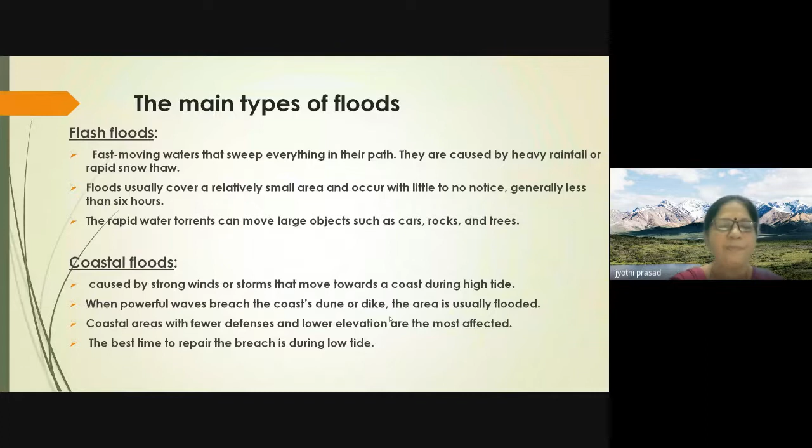And the other one is the river flood. So river flood means it is characterized by gradual river bank overflows. The river which is flowing, you can see it is gradually increasing. It is not suddenly increasing, it is gradually increasing because of the extensive rainfall, and it will extend from the banks sometimes.

So here mainly the area which is covered by the river flood all depends upon the size of the river and amount of the rainfall. Okay, so especially for river floods, it mainly depends on the size of the river as well as how much rainfall has occurred.

And in this case, in river floods, loss of lives rarely takes place. Loss of lives will be less, but it can cause immense economic damage. So it is going to create economic loss, especially the irrigated areas and all. Those things are going to be damaged by the river floods.

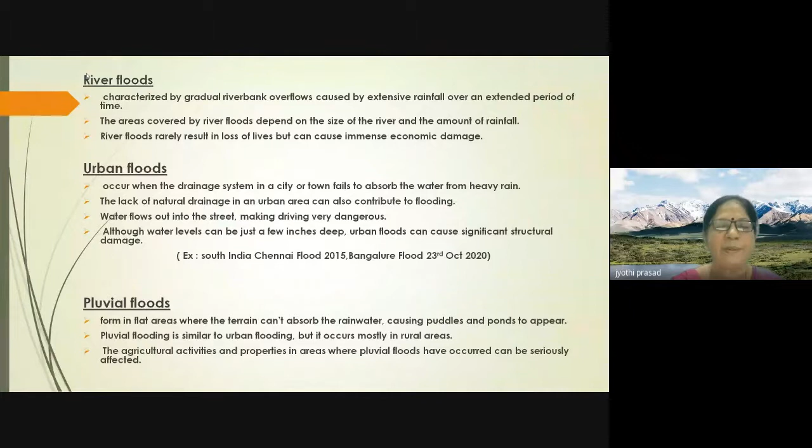And even the lack of natural drainage in the urban area is also contributing to the flood. And water flows into the street, making even driving very dangerous. I used to hear, especially in Muscat, that if the rain comes, most of the accidents take place because it is so steep and slippery, and the speed of the cars is also high, and they come and hit the cars. So that is also very dangerous.

Even though it is only a few inches deep in the case of urban floods, it creates a lot of problems for the public, especially in India. Nowadays we have heard, especially in South India, of the Chennai flood. The Chennai flood, which occurred in the year 2015, was caused by the rainfall and the concrete jungle; there was no proper drainage. Because of that, the entire Chennai was under flood.

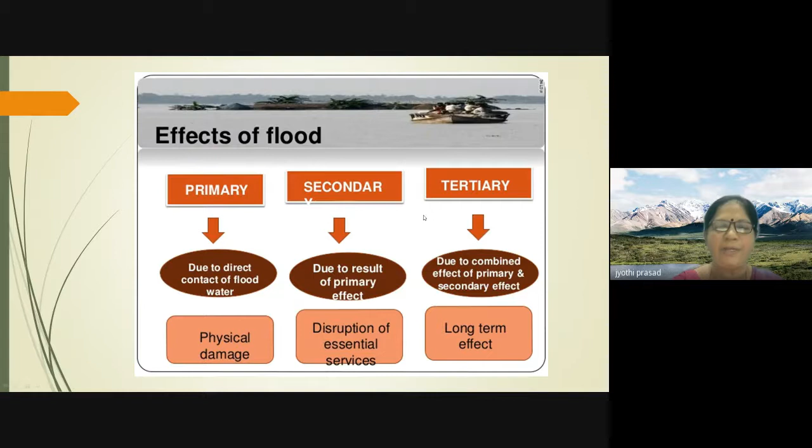So now, what is the secondary effect? The secondary effect disturbs certain services. Mainly, the drinking water supply may be polluted, especially if sewage treatment plants are flooded. If a sewage treatment plant gets flooded, it will definitely affect the drinking water supply. It may result in diseases and other health issues, especially in underdeveloped countries.

Even gas and electrical services may be disturbed. The transportation system may also be affected, resulting in shortage of food supply, vegetable supplies and so on. And sometimes, in underdeveloped countries, there can be a food shortage, and it may lead to starvation.

And what will be the long-term effect? The long-term effect is the tertiary effect. What happens here? The location of river channels may change as a result of flooding. Whenever a flood comes, the river channel may change its path, so a new channel develops, leaving the old channels dry. That is one of the effects. And even sediment is deposited by the flooding.

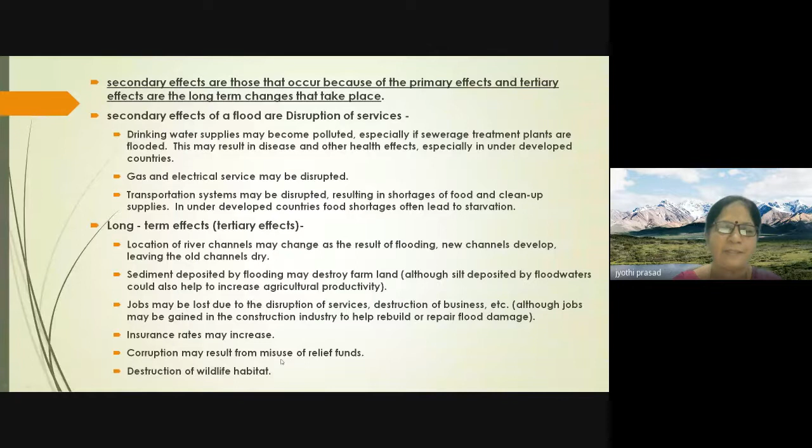So now, flood management. It cannot be absolutely controlled, only managed. Even though we say we can control the flood, and many researchers are working on it, it cannot be absolutely controlled. 100% control we cannot do; we can only manage it.

So what is the aim of flood management? The main aim is, whenever there is a flood, the first priority is protection of the people and their property. And also, as far as possible, reduction of flood risk. Whatever damage is going to happen, as far as possible, management tries to reduce the flood risk.

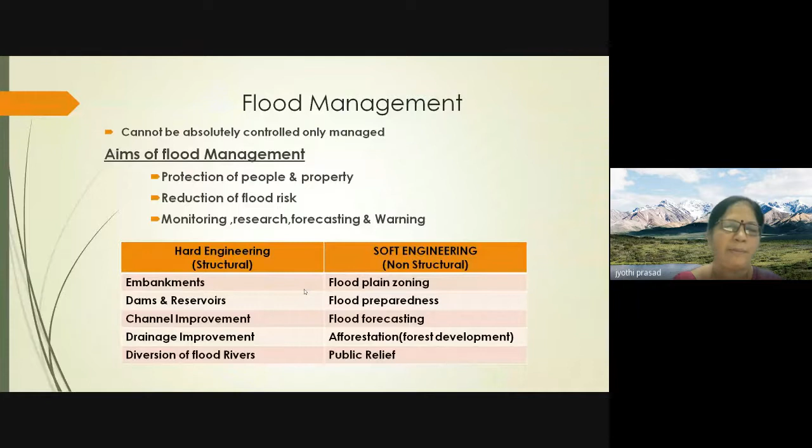For the public relief, what we are going to do, there are diversions of flood rivers. This diversion can be for irrigation purpose, or for the flood river water whenever it comes, and it will be left to one particular place, and the flood is diverted so that once flood water recedes, that land can be used by the public for irrigation purposes. So like that, we are going to do the flood management. Anyhow, it cannot be absolutely controlled, it can only be managed.

So now we know, especially in India, 9% of the total population, that is around 113 million people of India, are exposed to floods. And as per the World Resources Institute 2015, they have estimated around US $14.3 billion of the Indian economy is exposed to flood risk. So India is highly exposed to flood; 9% of the total population is exposed to flood.

So if you see here, the flood toll from 2016 to 2019-20: in 2016-17 the number of deaths across India was 1550. And similarly in 17-18 it was 2494. Like that, we have the number of death cases. And houses damaged in India in terms of lakhs: in 2016-17 around 5.5 lakhs, and in 17-18 around 11.9. So like that, lakhs of houses people have lost because of the flood.

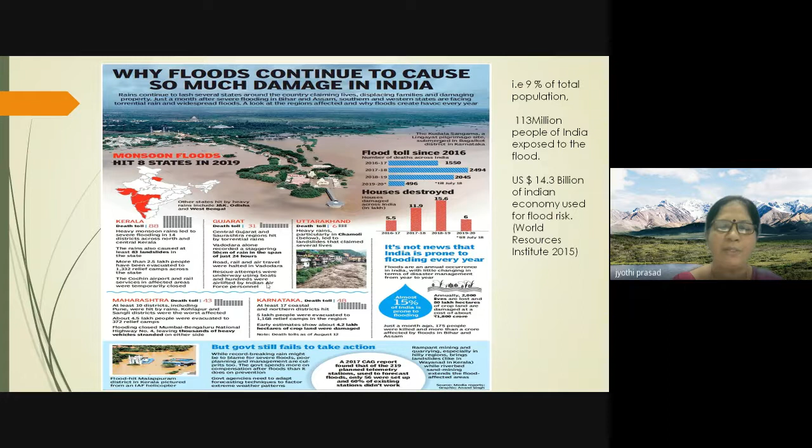So how are we going to study flood water management? All of us know, for flood control we need to construct a dam. Dams are the most important infrastructure for any developing country like India. India's total large dams are around 5,701, and in operation around 5,254, as of 2016, maybe still more now. Maharashtra has the maximum number of large dams, 2,354. Next to that we have Madhya Pradesh.

These dams especially help in flood water control, and they help for irrigation. As we know, around independence, the first priority of dam construction was irrigation, because food was the priority. So dams serve flood control, irrigation, municipal and industrial water supply, hydroelectric power generation, and recreation purposes too. So we have constructed dams with several aspects in mind.

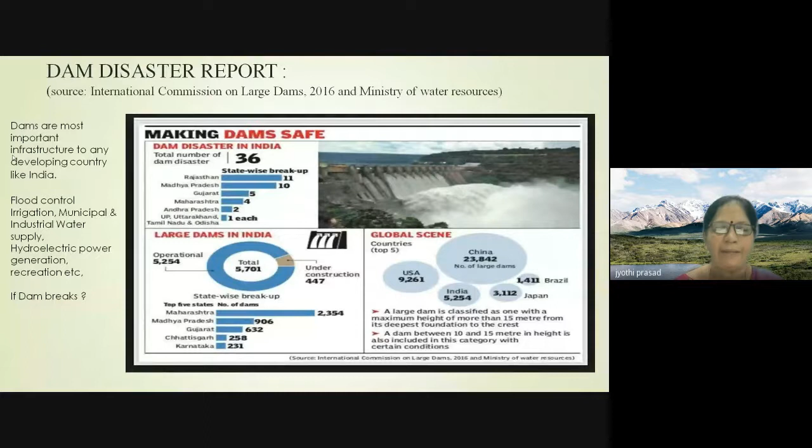But as I told, everything is nature, and nature will take its own way to balance the earth. So now suppose the dam breaks. What are the most frequent causes of major dam failures? According to the Costa report of 1985, the major causes of dam breach were overtopping due to insufficient spillway capacity, 34%, piping and seepage, 28%, and foundation defects, 30%.

And according to the UNDP report of 2004, among all natural water disasters, flood causes 50% of the total loss, and annually an average of about 196 million people across 90 countries are exposed to catastrophic flooding.

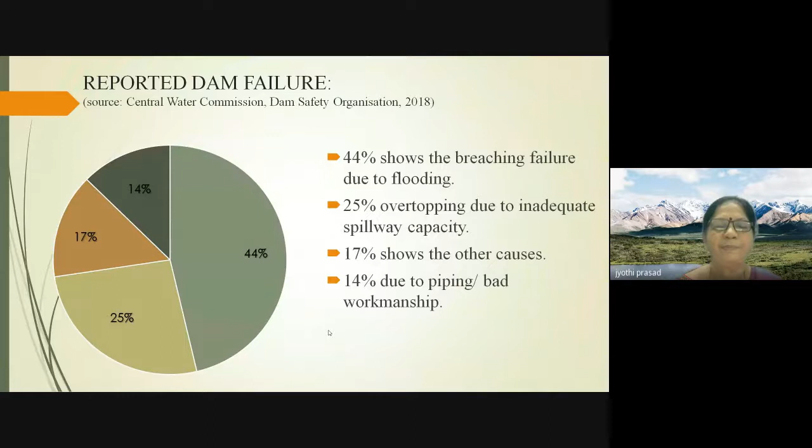So now, according to the Dam Safety Office, Water Resources Research Laboratory, Reclamation, in 1998, the methods of analysis are grouped into 4 categories. One is called the physically based method. The physically based method uses erosion models based on principles of hydraulics, sediment transport and soil mechanics. Development of the breach and the resulting breach outflow are anticipated, to see what the breach outflow will be.

The second one is the parametric model. The parametric model is based on breach geometry and failure time, which are estimated using case studies. With the help of hydraulics, breach outflows are assessed, and the breach expansion is evaluated as a time-dependent linear process. That means the breach geometry and failure are taken as a time-dependent linear process in the parametric model.

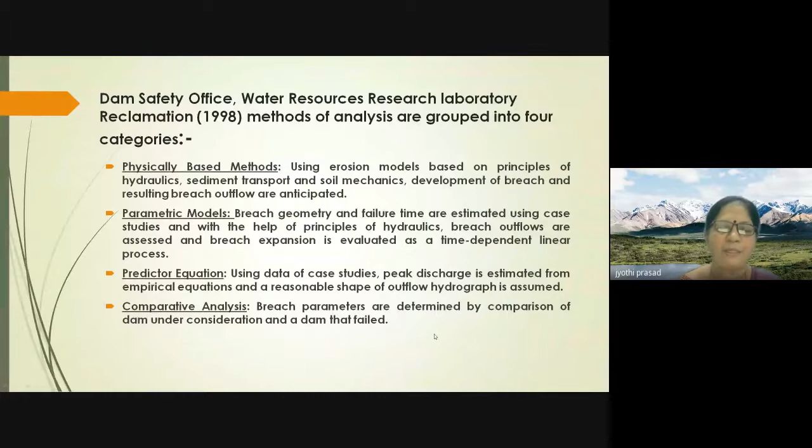The third is the predictor equation. Using data from case studies, peak discharge is estimated from empirical equations and a reasonable shape of the outflow hydrograph is assumed. And the last one is comparative analysis, where breach parameters are determined by comparing the dam under consideration with dams that have failed.

So now, dam breach modeling. Regardless of the design or construction of the dam, increased forces are applied to it during extreme events, which increases the potential risk of failure. Even a well-designed dam can face extreme events with a potential risk of failure. Therefore, dam breach analysis is conducted to determine the ultimate discharge from a hypothetical breach of the dam under such events.

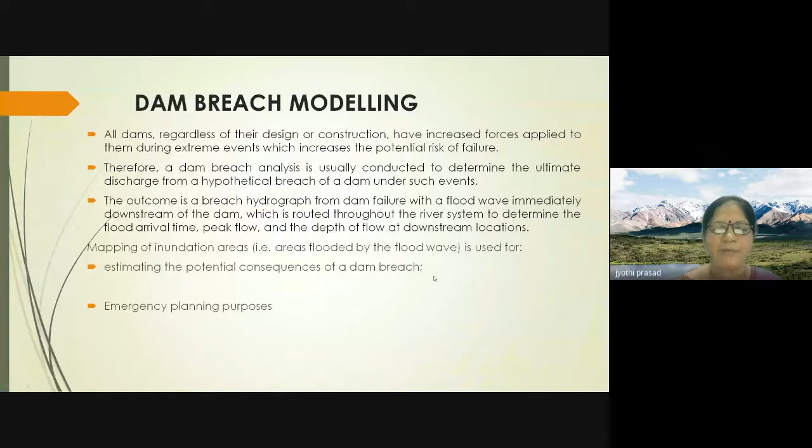The outcome is the breach hydrograph from the dam failure, with the flood wave immediately downstream of the dam, because when the flood breaches the dam, it moves towards the downstream side. It is routed through the river system to determine the flood arrival time, the peak flow and the depth of flow at downstream locations. Along with that, we need mapping of inundation areas, meaning areas flooded by the flood wave. This is done mainly for estimating the potential consequences of the dam breach and for emergency planning purposes.

So in dam break analysis, there are two primary tasks for analyzing potential dam failure. First is prediction of the reservoir outflow hydrograph, and second is routing of that hydrograph through the downstream area. To predict the reservoir hydrograph, there are some fundamental steps that need to be done.

One is prediction of breach characteristics, which may include the shape and size of the breach and the rate of breach formation. Breach characteristics mainly involve what shape the breach generally takes, what its size is, and the rate of breach formation.

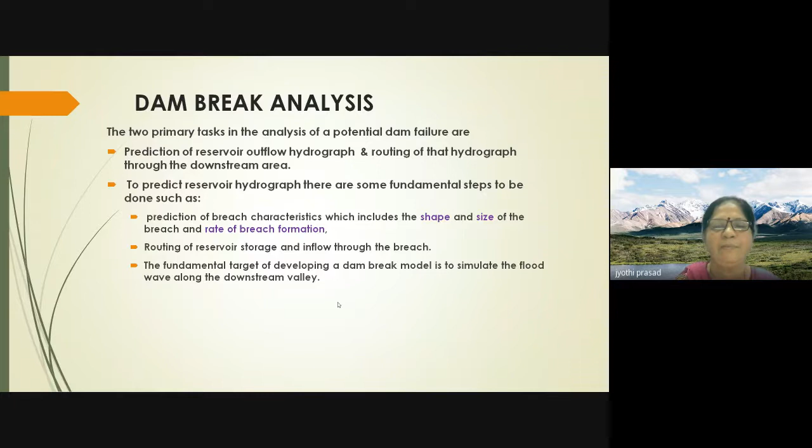So now, why do we want to study the dam break model? So the purpose for which we need to study the dam break model is, one, especially we can say it is the most important one, is preparedness - preparedness to tackle the disaster. Whatever the flood which is from rainfall has come, because of that this much flood is expected, and then finally what disaster can be expected.

So for that we need to have a preparedness to tackle the disaster. And then we need preparation of an inundation map. Preparation of the inundation map means at the downstream side, when the flood has come, how much distance it is going to cover, and then at what time the flood is to come, and we have to see how much area it is going to cover. So that time is also taken. That's why preparation of inundation map is required.

And then once the flood has come, before that we have to do the evacuation plan for the public. We have to intimate the public, like flood is coming, we have to evacuate. So recently on TV also you are seeing the news for evacuation where the gas is moving, so there also they are doing the evacuation of the public. So similarly here also for flood, we need to do the evacuation plan for the public.

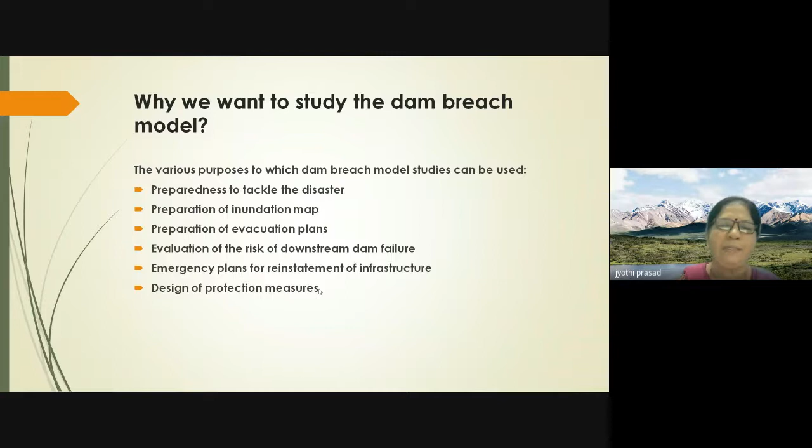And now, emergency action plan. So in case of emergency action plan, we have to identify those situations which would require initiation of an emergency action and specify the action taken and by whom. All these things should be considered.

Like an emergency may include a dam incident. What is this dam incident? It is an abnormal condition, or performance of the dam, with the potential to endanger the safety of the dam, but which is not expected to lead to a breach of the dam. So it is just highlighting that there can be a dam breach - it is just not expected, but you can say it endangers the safety.

And second is a dam alert. So dam alert means what we are going to see is that here there can be an intervention which could further degenerate with time and lead to the breach of the dam. So how the flow is occurring and what is the time, so that the breach can occur in the dam. That is a dam alert.

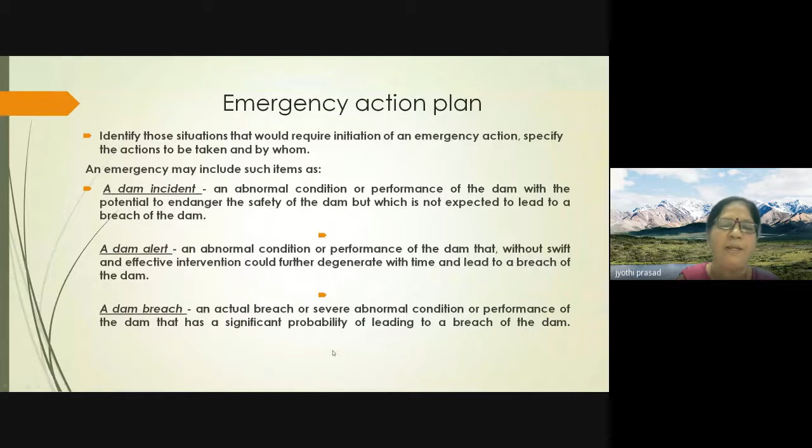And then dam breach. So dam breach means the actual breach, or we can say it is a severe abnormal condition, or performance of the dam that has significant probability of leading to the breach of the dam. So it is the worst condition in which the dam is going to breach. So that we have to see.

For that, we have to identify the people who are involved, like different agencies and alternative methods and the emergency action plan - we have to identify them. And even we have to identify the primary and auxiliary communication systems, both internal, that is between the persons at the dam, and external, between the dam personnel and outside agencies. And we have to identify all the agencies who are directly or indirectly involved, especially to prepare the emergency action plan. And finally, it leads to the development of the draft of the emergency action plan. So that is one of the most important parameters that needs to be taken into consideration.

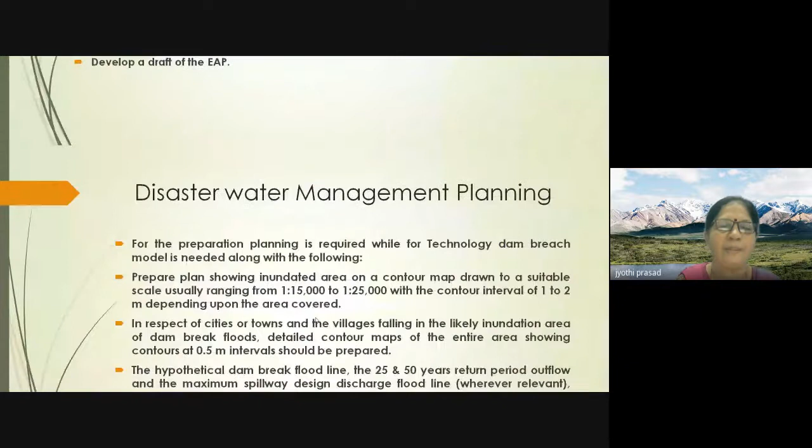So when we do the disaster water management planning, for the prediction and preparation of planning, it is required. Anything we want to do, we have to require a planning. Preparation of planning is one of the most important things. For technology, we need a dam breach model, along with what things we have to take into consideration. So we need preparation of planning, and we need the technology for dam breach model.

So for that, we need to prepare a plan which should show the inundated area on a contour map. It can be drawn with a suitable scale, which may vary from 1 in 15,000 to 25,000, with a contour interval of 1 to 2 meters, depending upon the area to be covered.

In respect of cities, towns and villages falling under the inundated area of the dam break floods, detailed contour maps of the entire area, showing a contour interval of 0.5 meter, should be prepared. So a detailed study of what cities, towns and villages fall in the inundation area. When the dam breaks, a contour map has to be prepared for the entire area.

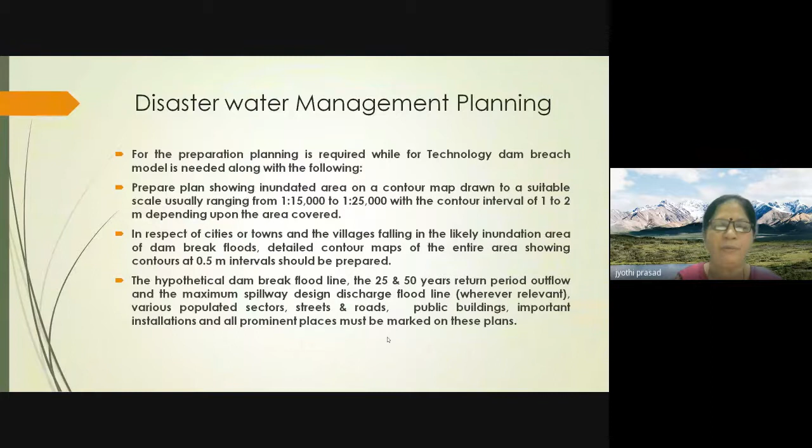Hypothetically, if you see the dam break flood line, that is the 25 and 50 years return period outflow, and the maximum spillway design discharge flood line wherever relevant, various populated sectors, streets, roads, public buildings, important installations, and all prominent places must be marked in the plans. We have to see the 25 to 50 years return period flood going out from the spillway. All this data should be there.

Now, speaking on the inundation map, we need to prepare an inundation map. Whenever dam failure occurs, at the downstream side, how much area is included - that should be in the emergency action plan. Correspondingly, we have to see what will be the level of effort used in calculation. Inundation maps should also show the time to flood and time to peak flow.

The complexity of inundation mapping depends on the expected impact of the dam failure on the downstream population and infrastructure. Those things should come in the inundation map, especially the approximate inundation maps.

Where do we get it? It is generally prepared by Survey of India, which is responsible for all topographical control, surveys and mapping of India. Survey of India topographical maps give all the details, city street maps or other maps. Some are available as free internet map services like Google Maps, Bing Maps, Yahoo Maps and MapQuest.

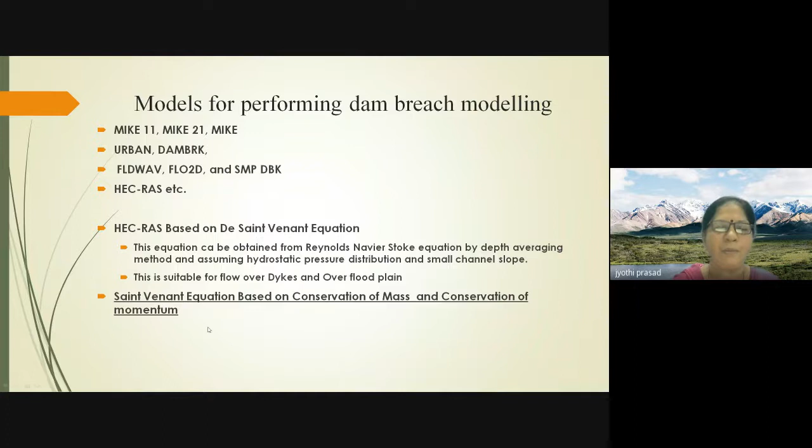These equations are obtained from the Reynolds-Navier-Stokes equations by depth-averaging, assuming hydrostatic pressure distribution and small channel slope, and are used for dikes and over floodplains. The Saint Venant equations are based on conservation of mass and conservation of momentum. This is what is used in the HEC-RAS software.

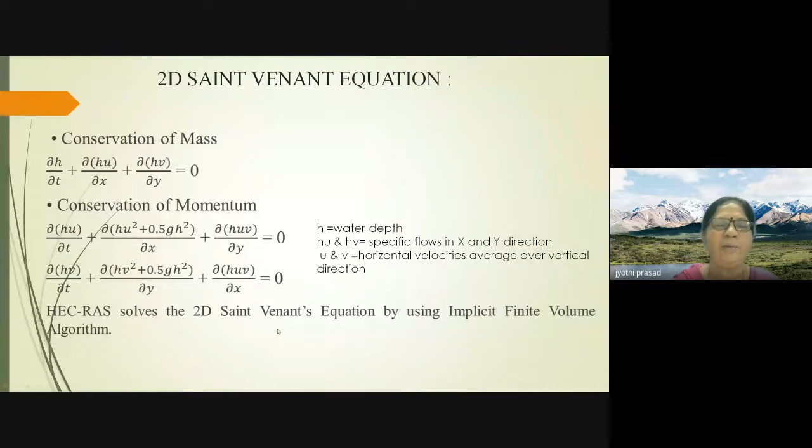One equation is conservation of mass, and the other is conservation of momentum. H is the water depth, HU and HV are specific flows in the X and Y directions, and U, V are velocities. This is used in both 2D and 1D forms of the Saint Venant equations.

What is the uncertainty in dam break analysis for flood forecasting? One source of uncertainty is data requirement—data is most important. If you are not feeding the data properly, there will be a problem. Even model formulation depends on the specific application. Considering the boundary condition is also one of the most important parameters, so it has to be taken very properly.

Model input preparation is important—whether the input is given properly or not. Even the model output needs to be checked, whether it has come out correct or not. Finally, analyzing and interpreting the results obtained from the model output is also one of the most important considerations regarding the uncertainty of dam break analysis.

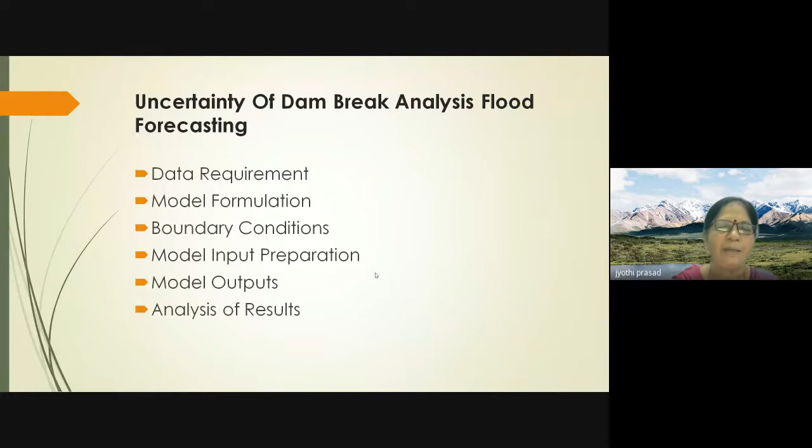But anyhow, primary data is sometimes very difficult to obtain, so sometimes we have to go for secondary data instead.

So now, HEC-RAS model for dam breach modeling. As I mentioned, HEC-RAS is an open-source software and a computer program developed by the Hydrologic Engineering Center of the United States Department of Defense, Army Corps of Engineers.

In modeling hydraulics, it initially started for natural river flow and other channels, and also manages rivers, harbors and other public works precisely. HEC-RAS was only for 1D, one-dimensional modeling, with no direct modeling of hydraulic effects of cross sections, shape changes, bends, and other two-dimensional and three-dimensional aspects of flow.

But later on, it started supporting two-dimensional modeling as well—this happened recently, in 2019, when version 5.07 was released. So HEC-RAS is not a physically based model.

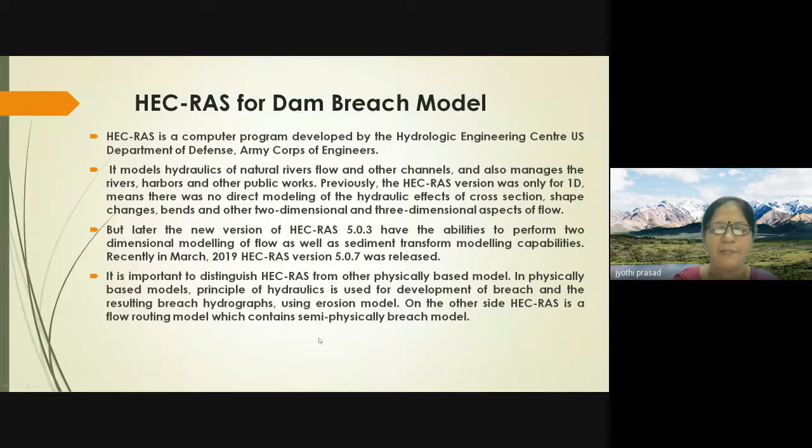Just to highlight the advantage of the HEC-RAS model, it is recognized by several government organizations and private firms also. It is also available in the public domain, and we have both one-dimensional and two-dimensional there.

And whenever we do the modeling, the coarser grid size, cell size, takes into account the subgrid scale variations, there is a bathymetry also there, and this is an implicit finite volume algorithm. It is going to solve the 2D unsteady flow equation. It is one of the advantages here.

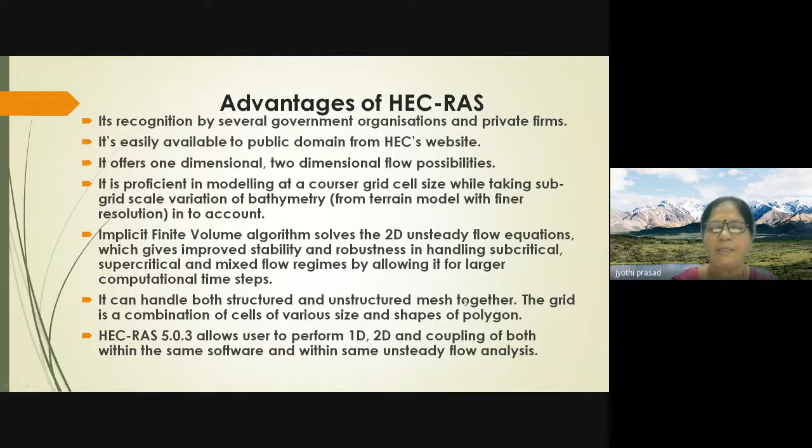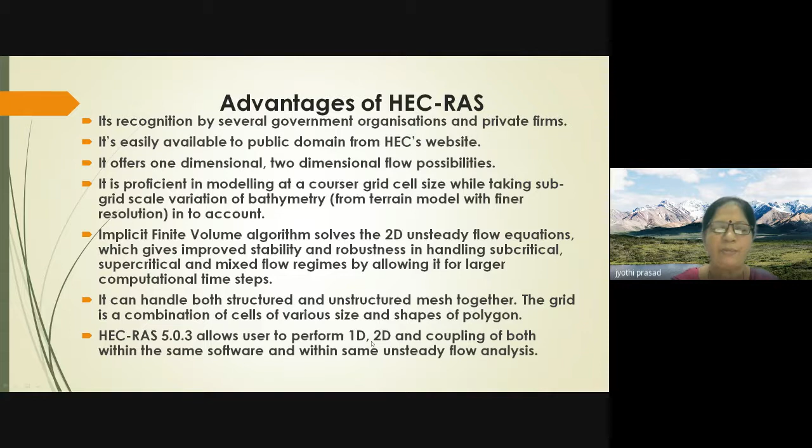It can handle both structured and unstructured mesh together. And it is a combination of cells of various sizes and shapes of polygon. And it can perform, as I already told, 1D, 2D, and coupling of both within the same software and within the same unsteady flow analysis. And what are the limitations?

Limitations like sometimes the user may face instability and difficulty during the unsteady analysis. And the breach parameter uncertainty may cause uncertainty in the flood peak and its arrival time. So you have to be very careful whenever you are evaluating the breach parameter.

And we can see that scouring of the channel bed takes place whenever there is a flood wave with a high velocity, and it increases the river cross section. So those effects of enlargement and the equation of sediment transport are not considered in the equations of the model.

And the maximum size of any polygon in the grid mesh is considered to be 8. If you want to go for more number of sides, you cannot do the computation here. So HEC-RAS does not support the bridge model capabilities, and even for water quality modeling, it is not supporting.

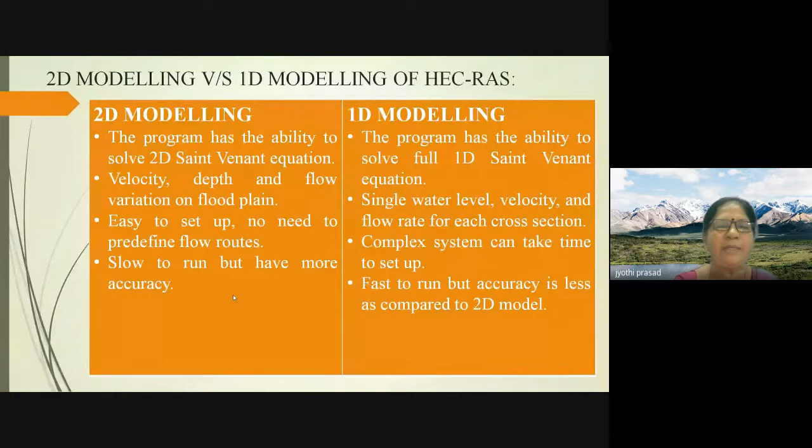And precise prediction of the breach parameter is very much essential to make a reliable evaluation of the peak outflow. That evaluation must be very correct, then only we can say it can be applied properly. Anyhow, we will see this in the demonstration of the 1D and 2D model.

And breach location. So breach location also comes into the mind. All models reviewed by Mohamed 2002 assumed that the breach is located centrally within a dam or the embankment. However, some failures have shown that the breach might occur near the abutment rather than the middle of the dam.

So there are certain examples where the breach has not occurred exactly at the center. That's why the breach growth and outflow from a centrally located breach is likely to be different from a side breach in terms of the time of peak discharge, peak value, and hydrograph shape. So that is also most important.

Where is the breach location? Whether it is a central location or at the side, and what is the time of peak discharge, peak value, and what will be the hydrograph shape. So that is one of the important things here.

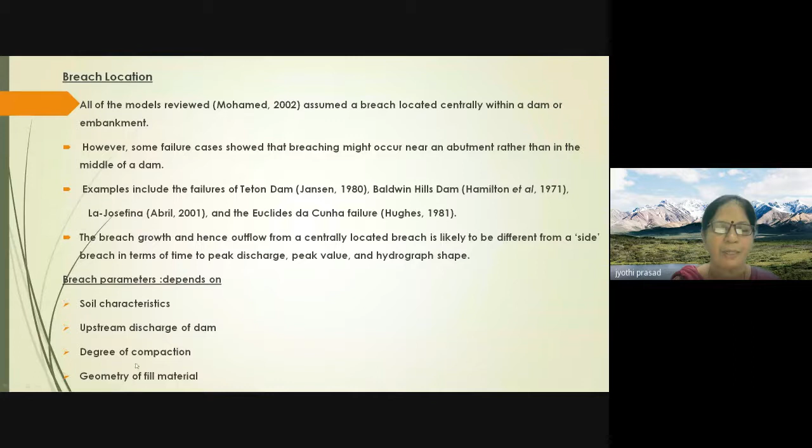So breach parameter depends on soil characteristics, upstream discharge of the dam, degree of compaction, and geometry of the fill materials. Dam breach parameters are classified into two types: one is geometric parameters and the other is time-related parameters. Geometric parameters means breach depth or height.

It is perpendicular to the extent of the breach, measured from the dam crest down to the bottom of the breach. Okay, it is from the dam crest to the bottom. So that is the breach depth or height. And then width.

Breach width is generally taken as an average width. It is taken of the top and the bottom width, so the average width will always be taken as an input. The third is the breach side slope factor. The breach side slope factor is generally represented as horizontal to vertical. It is described as the number of units of horizontal distance to every 1 unit in the vertical. So that is the horizontal to the vertical.

Now, what are the time related parameters? The first time related parameter is breach initiation time. Breach initiation time is defined as the first flow of water through the dam that will initiate the warning for evacuation. It has just started. So the first flow of water through the dam is taken as the breach initiation time.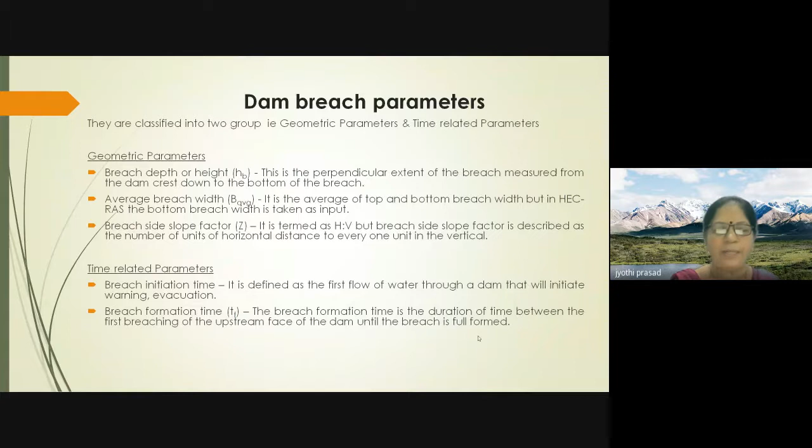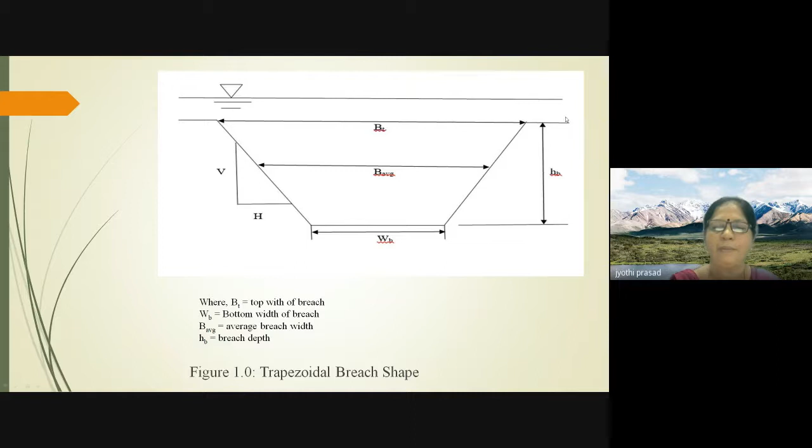The second is breach formation time. Breach formation time is the duration of time between the first breaching of the upstream face of the dam until the breach is fully formed. It is first breaching up to fully formed, so that is called the breach formation time. Generally the trapezoidal section is considered because of many reviews. There is the bottom width and top width, and the average width is going to be considered, and this is the depth of the breach. This is the trapezoidal breach.

Similarly, the horizontal component of the breach side slope, horizontal to vertical, and the failure time we take whenever we do the modeling. You have to consider the time of failure. So depending upon what type of dam it is, you consider the guidelines, and as per the guidelines you calculate the breach width, horizontal slope, and time we are going to assume. This is according to the Central Water Commission.

Now, Manning's n, as all of us know, is mostly the roughness factor. Roughness is also a most important parameter. Based on the roughness, the flow on the downstream side takes place, especially in the floodplains. Chow has also given certain Manning's n values, and certain standard values are also there. The Manning's value all depends upon the site visit; after that we have to consider the Manning's roughness value.

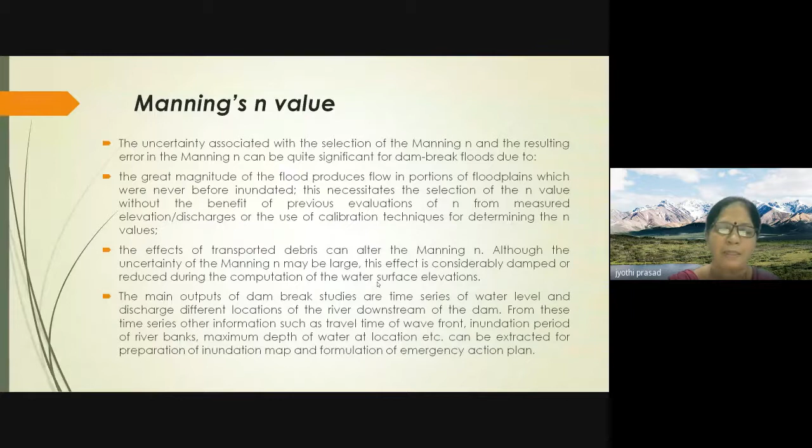This Manning's roughness value will also play a role, especially whenever you are making the inundation map. If roughness is more, then the movement of the flow will be less. So depending on how the roughness of the surface varies, it will help in inundation map preparation for the downstream area.

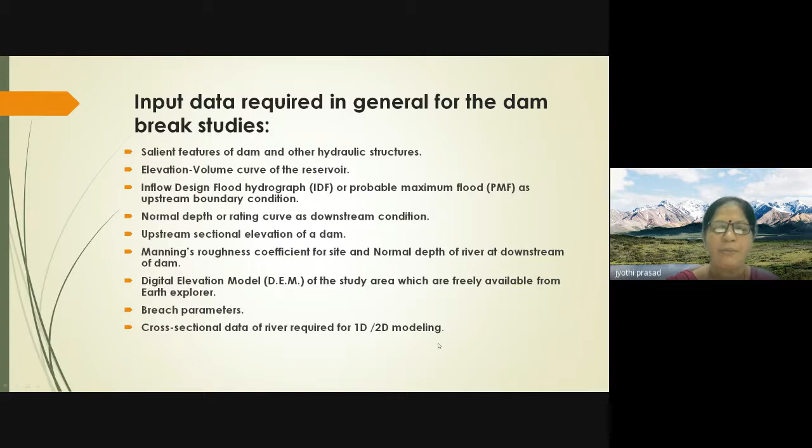What is the input data required in general for dam break analysis? We require the salient features of the dam and all the hydraulic structures, the elevation volume curve of the reservoir, and the inflow design flood hydrograph, or probable maximum flood, as the upstream boundary condition. Then we require normal depth and rating curves as the downstream condition, the upstream sectional elevation of the dam, Manning's roughness coefficient, a digital elevation model, breach parameters, and the cross sections of the river, for a 1D or 2D model.

These are the different steps involved in dam break modeling using the HEC-RAS software, and the steps I have already given in the lecture notes. Now this is the final output of the dam break analysis: how the dam breach occurs and how the flood wave is going to move.

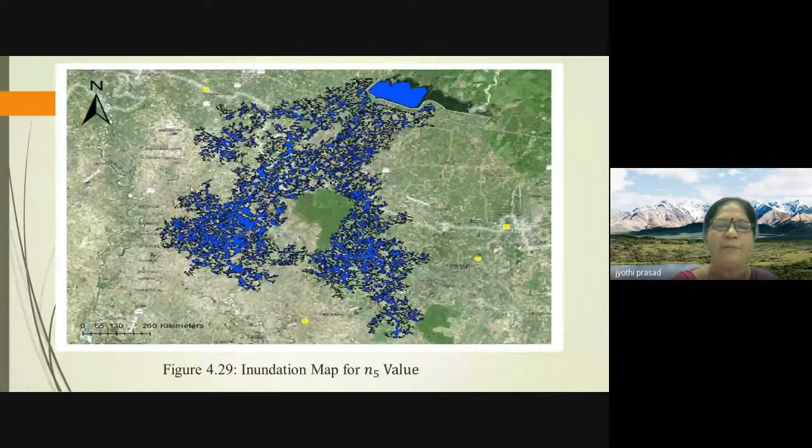It is just a flood inundation map on the downstream of the dam. As I told you, Meenakshi Ramola is going to explain how, depending on the roughness, your flood is going to come on the downstream side. So after the breach, this is the inundation map. One of the inundation maps was prepared by her in one of her topics.

So now what I will be doing, she is going to... Aditya sir, Dr. Aditya. Yes, ma'am. Yes, ma'am. Now Meenakshi Ramola.

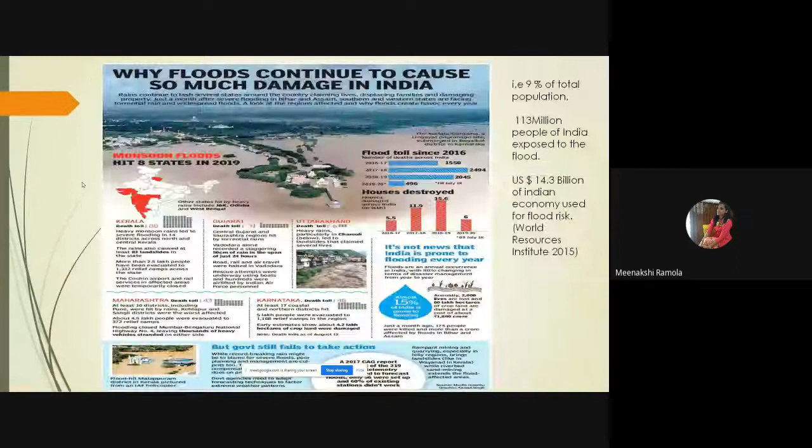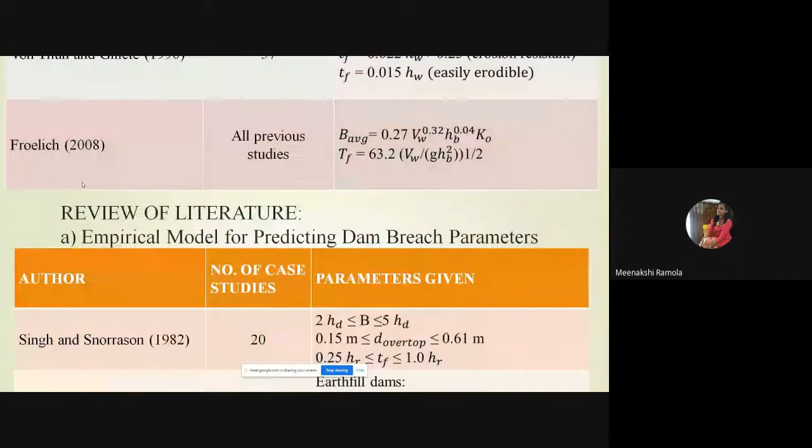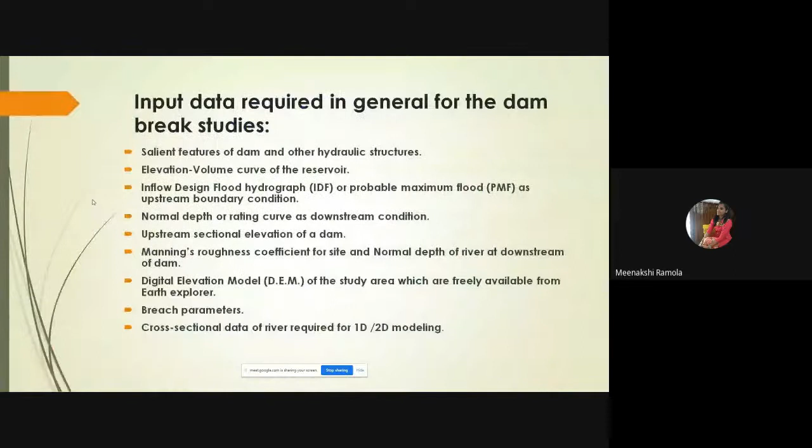Okay, ma'am. Ma'am, I will explain you just. It's shared now, see. Yes, ma'am. Start from this step, okay? One second. Ma'am, you just show the step slide. I will describe it. Okay. Yes, ma'am, this one. Okay.

Okay, the first one is the 2D dam break modeling. Firstly, for 1D and 2D, we both require a digital elevation model that we can download from the Bhuvan portal, or you can download it from Earth Explorer. Before that, I have shown, I think, projection and your terrain file, how to load it in the software. After that, there is one tool, Geometric Data Editor, where we can go to the storage editor. Storage means reservoir.

Right now I am dealing with the 2D. Firstly we will draw the storage area, that is the reservoir. After that, we will go for create 2D area. In the HEC-RAS software, these options are in the top panel. The 2D area means the downstream area of our dam. When we go to the 2D area, it will ask the mesh size. So we will give it a pixel number of 10 to 15. You can give it according to your choice.

Now, how will you connect the storage area and 2D area? In two-dimensional modeling, we will do it by the connection. There is one tool, SA/2D connection, in the Geometric Data Editor. After connecting this, we will check whether our storage area is created or not. If it is created, then okay. Otherwise, we have to create it again.

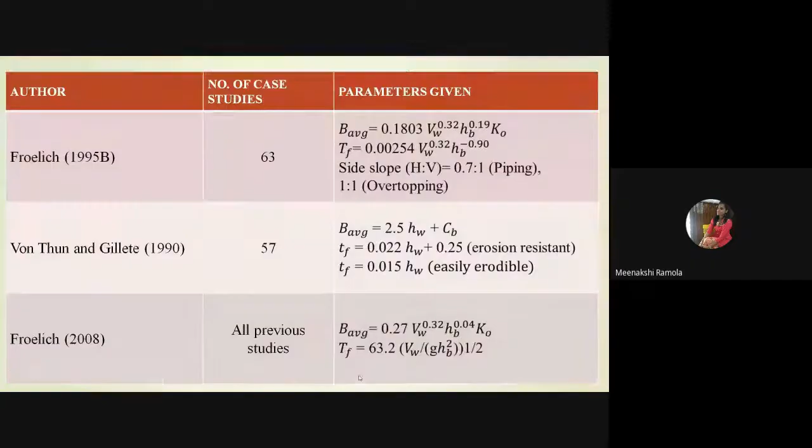Ma'am? Baur dam, can you explain? Baur? Ma'am, this one? Baur dam hai, iska. Okay.

In my MTech, I did the study on the Baur dam. It is located in Udham Singh Nagar district of Uttarakhand. The rivers Bor and Karla are nearest to it. Basically the Baur dam is an earthen dam. And one more thing, when you give the breach data, you can select whether your dam is an earthen dam or concrete dam. This particular Baur dam is an earthen dam.

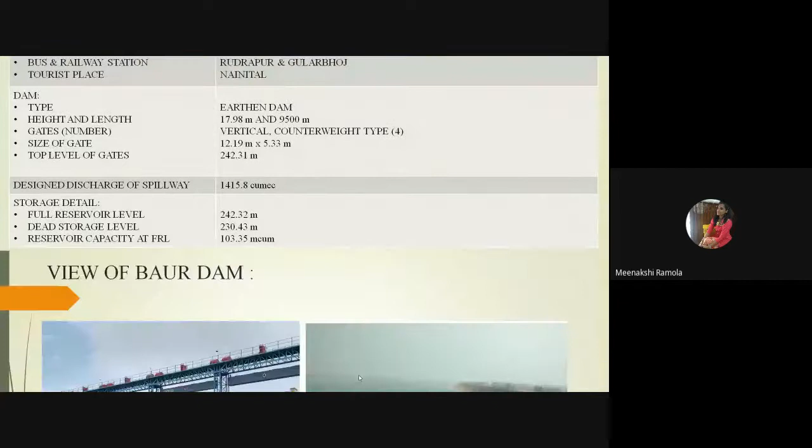The gate type is vertical. You have to know the size of the gates and the top level of the gates. All these things will be required in your model. After that, storage details: full reservoir level, dead storage level, reservoir capacity at FRL. All this data will be given by your water resource department. This is the view of Baur dam.

In this modeling, whenever we go to the breach parameter panel, it will ask whether you want to do overtopping failure or piping failure. This is upon the user's choice—you can choose either from there.

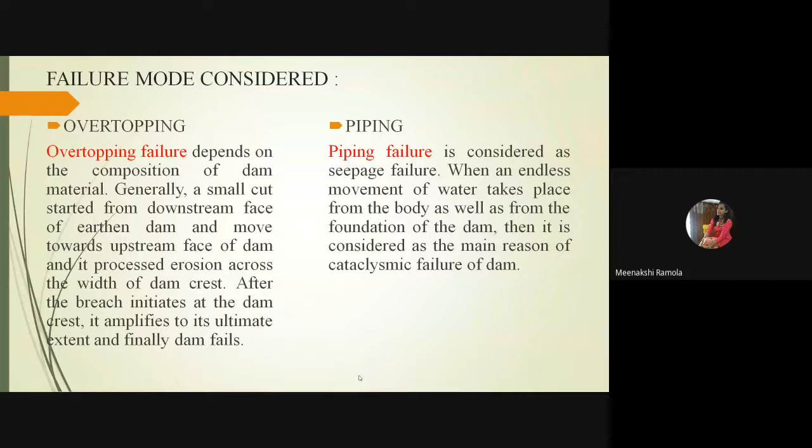In our MTech work, I have simulated various scenarios. First is full reservoir level with overtopping failure. Second, full reservoir level with piping failure. Third is storage level with overtopping failure, and fourth is storage level with piping failure. In scenario 5, I have dealt with different Manning's roughness values, so we can see how they affect our inundation map—that means discharge, depth, and all other things.

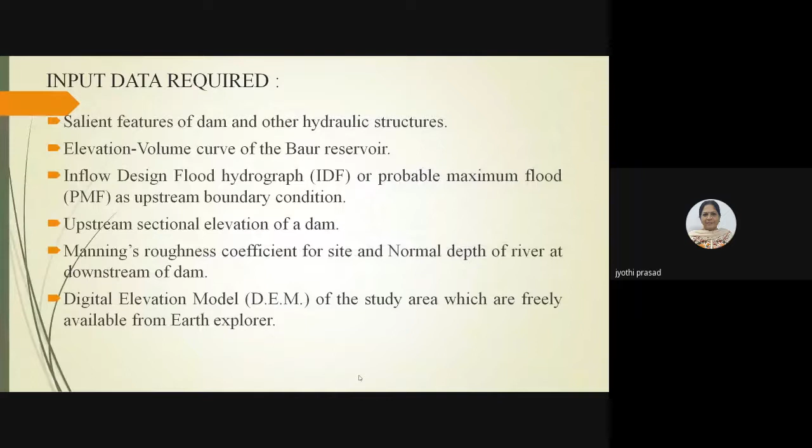In 2D, the area downstream of the dam you can choose by your choice. But in 1D modeling, the inundation map will only be up to your cross-section detail—that means after your cross-section, you can't show your inundation map.

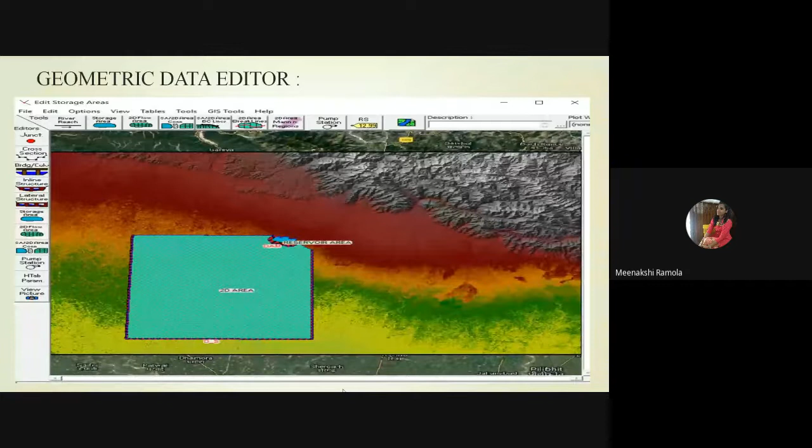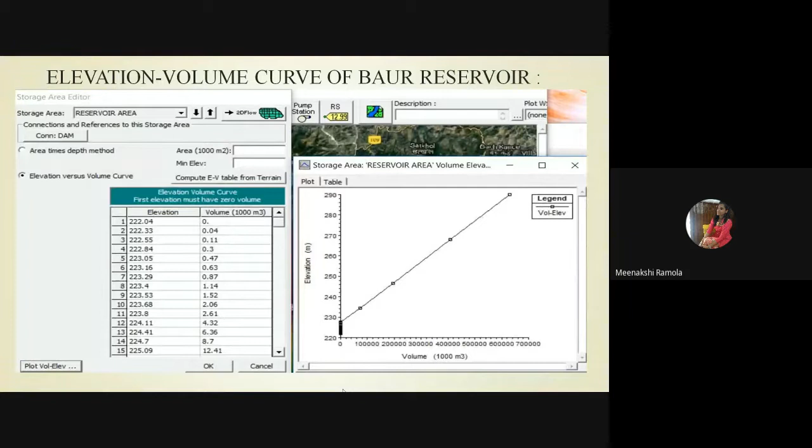So this is the elevation volume curve used in the reservoir. Next, these are here—you can see top of dam elevation, pool elevation at failure, breach bottom elevation, pool volume at failure.

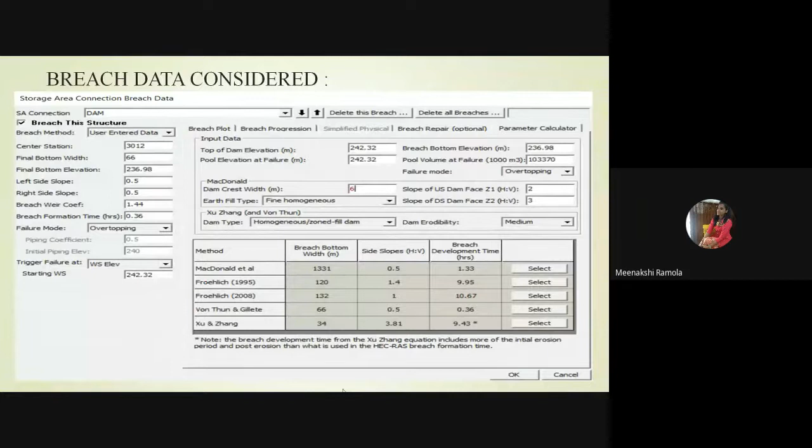When you provide all the details and select your earth fill type—homogeneous or concrete, everything—and click on that, there are different methods: MacDonald et al., Froehlich 1995, Froehlich 2008, Von Thun and Gillette, Xu and Zhang. These are the 5 basic different equations, also used by the Government of India for developing breach parameters. So you can directly use those parameters and start your breach analysis.

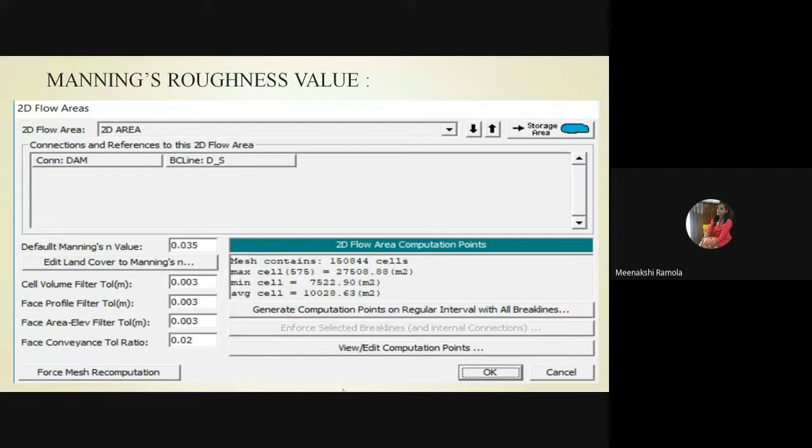This is where you can select the 2D flow area. If you click on that, you will see this panel, where you provide your Manning's roughness value.

Now this is the unsteady flow data editor, where you have to give all your details—the upstream boundary condition as a reservoir area will perform as an upstream boundary condition, where you give your PMF, that is the lateral inflow hydrograph. In the downstream condition you give the normal depth, and in the connection system you will automatically show the dam, where you give your gate details.

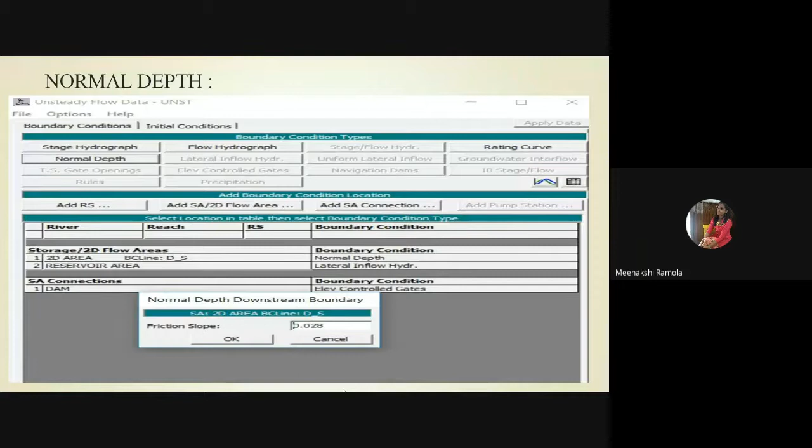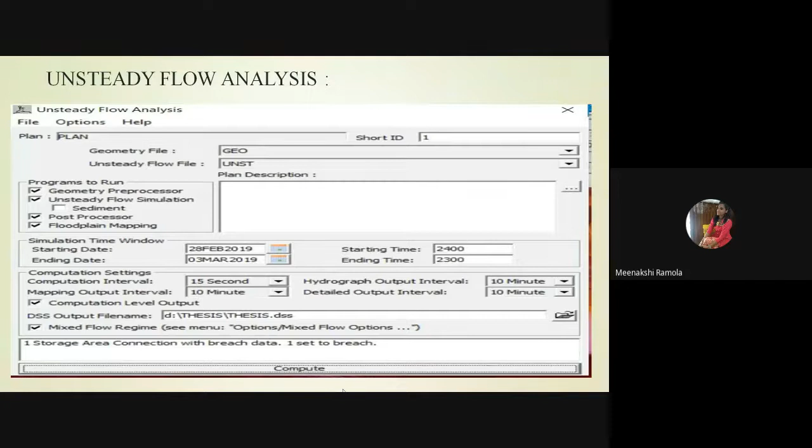Now this is the final window of your unsteady flow analysis, where you have to check all those—geometric pre-processor, unsteady flow simulation, post-processor, flood plain mapping. You will also give your starting and ending date, which has to be the same as in the PMF—whatever date you used in your lateral inflow hydrograph, the same date has to be here. After that, computing interval, mapping output interval, according to your choice. Then you check all those things.

Finally, in the RASMapper tool, where we have given the projection and terrain file, you check all the left side things—results, geometric. In the geometries, you will see the storage area, 2D flow area. When dealing with one-dimensional modeling, it will also check—there will be river and cross sections. In the results, you can see geometry, inundation boundary, velocity, water surface elevation, depth, etc.

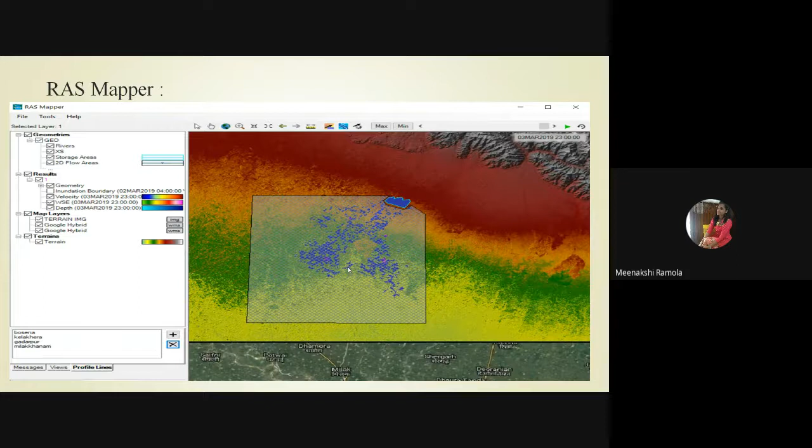And this one is the Baur Dam inundation map. I have taken that much area, so the inundation map is within my range of the 2D area—that means if sometime this dam breaks, only this much flood will inundate the downstream of the reservoir or dam.

Yeah, yeah. Yes, tell me.

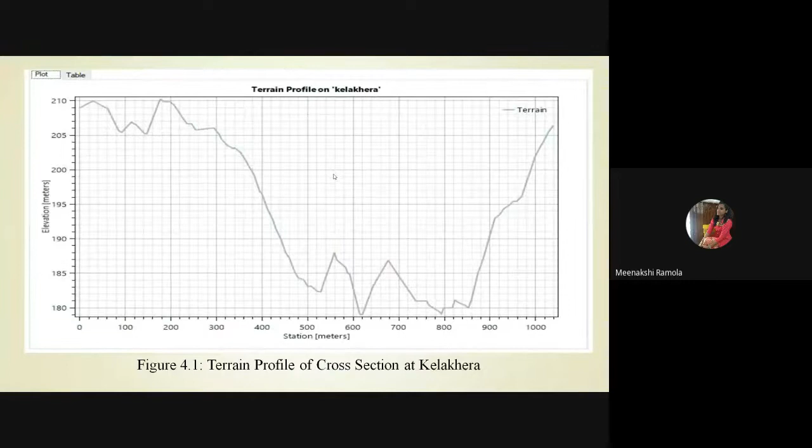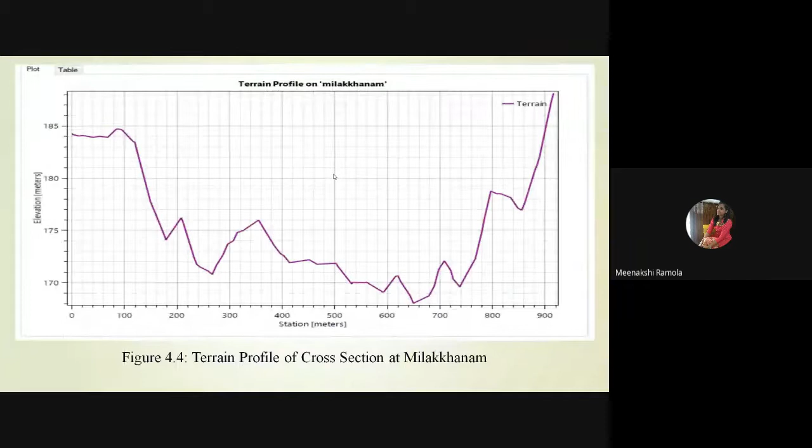These are the terrain profile cross sections at different places, such as Kelakhera. These results you can see in the RAS Mapper tool of your HEC-RAS model. This one is for Bosena and Milakkhanam, places downstream of your Baur Dam.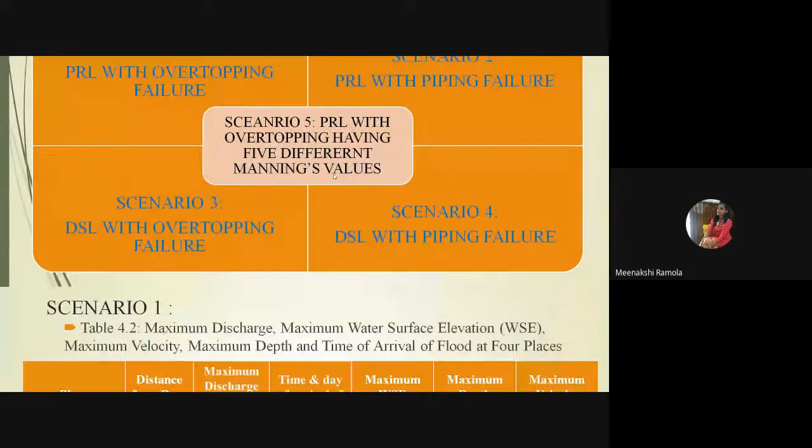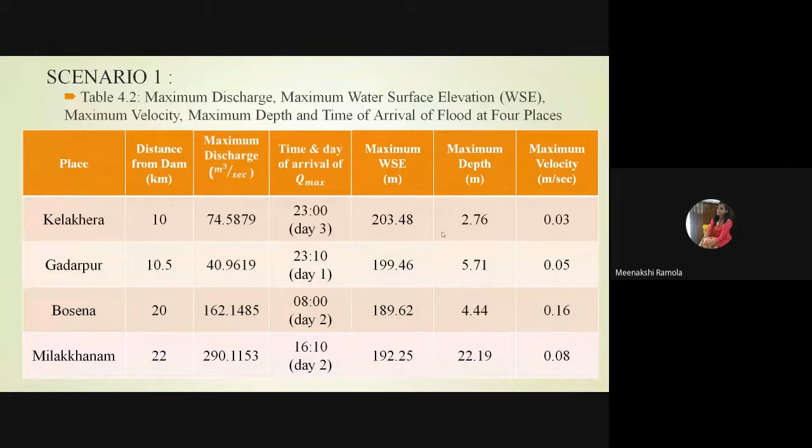Now these are the 5 different scenarios. This is the table after plotting all the details and results, the final table I have plotted for scenario 1. In this we can see different places, distance from dam, maximum discharge value, the time and day when maximum discharge arrived at each place, maximum water surface elevation, maximum depth, and maximum velocity of the flood.

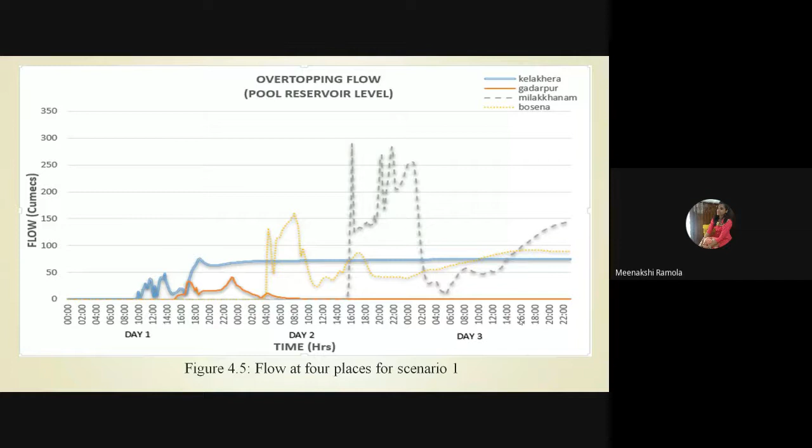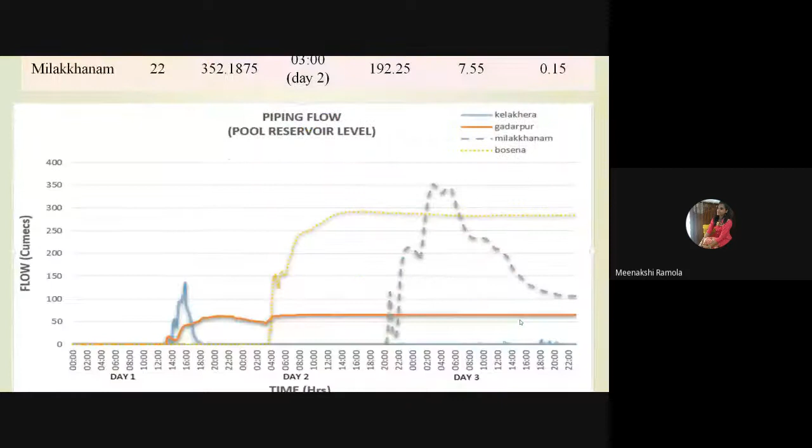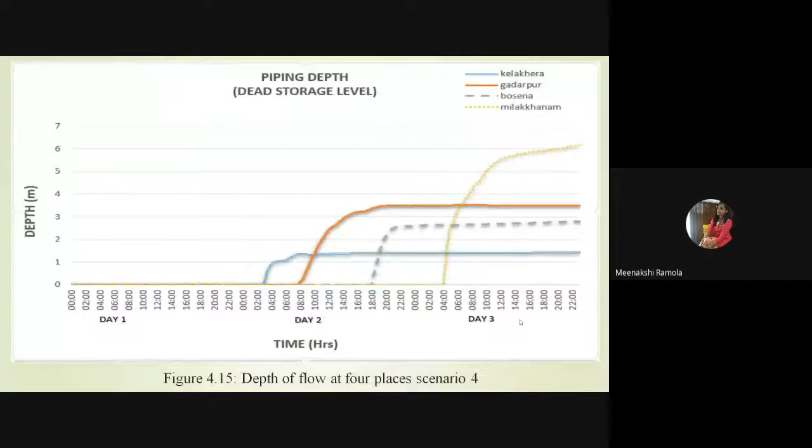This one is the final hydrograph for the overtopping flow condition at pool reservoir level. For different scenarios, different hydrographs are plotted at 4 places. These are all the results I have simulated in my work, and in 2D modeling, you can check those results in the RAS mapper only.

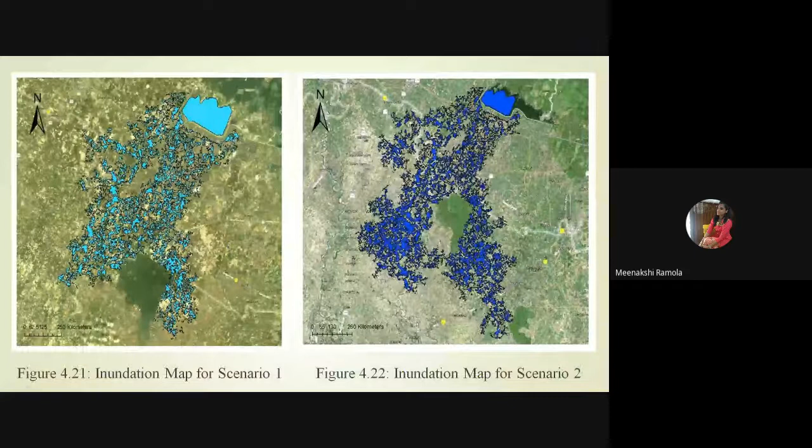Now, finally, what is the plotting of a flood inundation map? HEC-RAS is a tool where you can actually see your flood inundation mapping and visualize it. If possible, I will check it again if my work permits. These are the different case inundation maps.

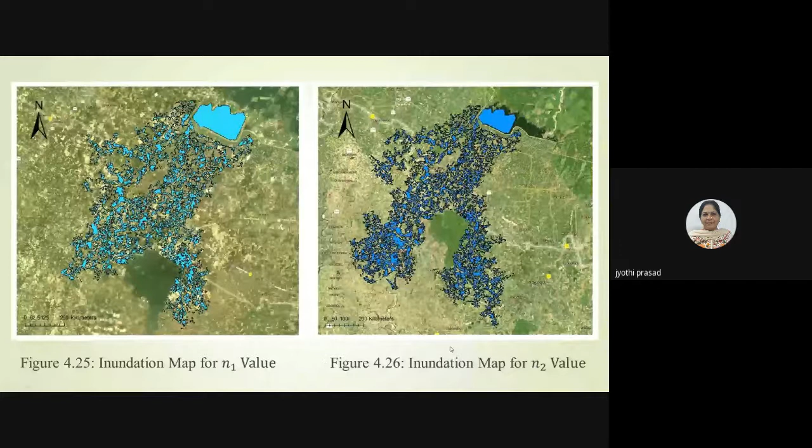The roughness of inundation - as you all know, as the Manning's roughness value increases, your discharge will decrease. So these are for different scenarios of Manning's roughness values.

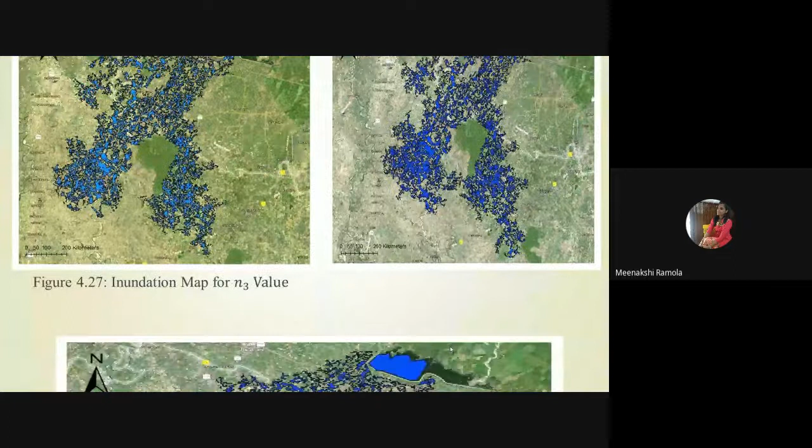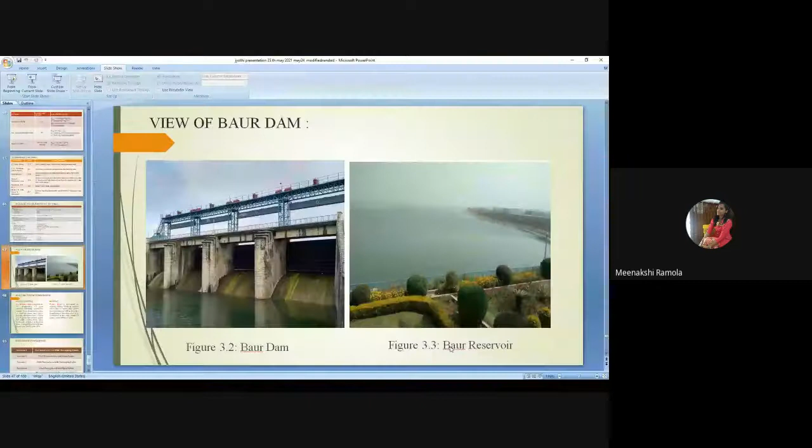Okay, finally the conclusion, ma'am. I want to try one more time. Is time available, sir? Yes. One time I will do the presentation and then stop. Okay, I will try once more. If it will work, then tell me, otherwise I will close it.

Is it visible? It's coming. Visible, ma'am, okay, this one is the full work. So I will just show you the animated video in the HEC-RAS model.

So you can see how your flood will move. If you click on this button, this is the animation video in the HEC-RAS model. You can check it, and this is the final flood inundation map, which you can also generate very nicely in the QGIS software.

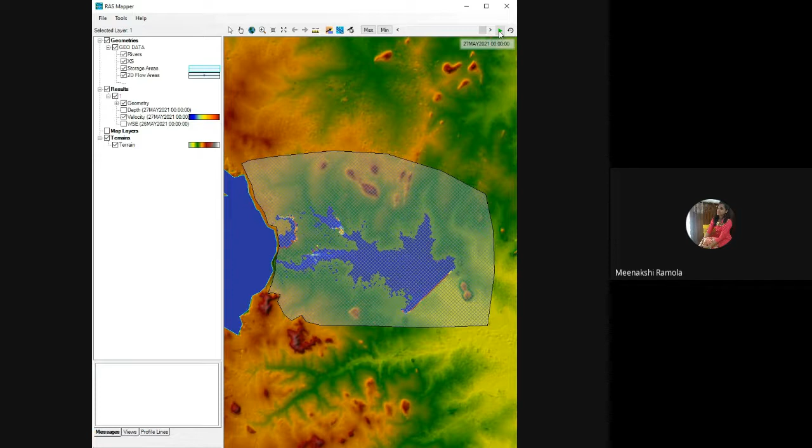Okay, is this visible now? Yes, visible, ma'am. Okay. Then this will be the final work showing how to plot the flood inundation map.

Okay. Okay, ma'am. Okay, sir. Okay, thank you. Thank you.